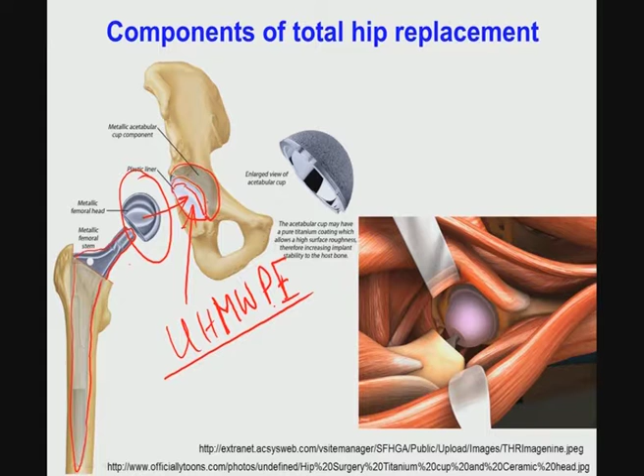Now, what is most important for the discussion in this module is whether the clinically used highly cross linked ultra high molecular weight polyethylene can be replaced with one of the materials that we have investigated for the last 6 to 7 years, that is, high density polyethylene-hydroxyapatite-alumina. Some more details on material selection for the acetabular cup or socket component. In this module I will be using cup and socket interchangeably; they are synonymous.

There is one class of THR implants, essentially hard on hard implants. Hard on hard means you can use ceramic as the acetabular socket and ceramic as the femoral ball head together. So both can be made of ceramic, or they can be made of metal. For example, metal on metal like cobalt chrome is a popular choice.

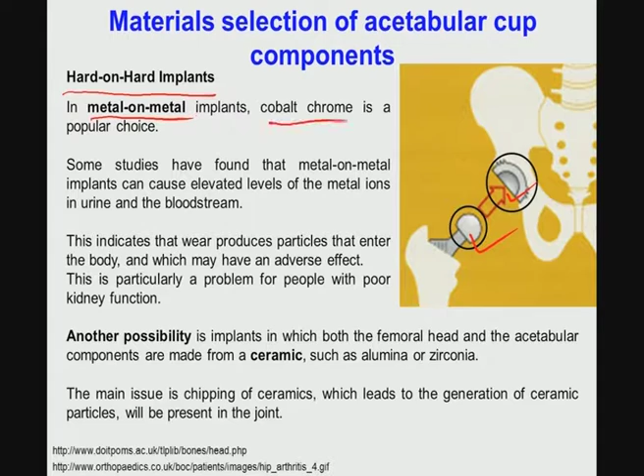The second one is hard on soft implants. What is the meaning of hard on soft? The head can be either metal or ceramic, and the acetabular socket can be polymer, where ultra high molecular weight polyethylene can be used. Ultra high molecular weight polyethylene has densely packed linear polyethylene chains, which give increased crystallinity as well as improved mechanical properties. However, it does not have a large elongation to failure, has poor fracture toughness, and also poor wear resistance.

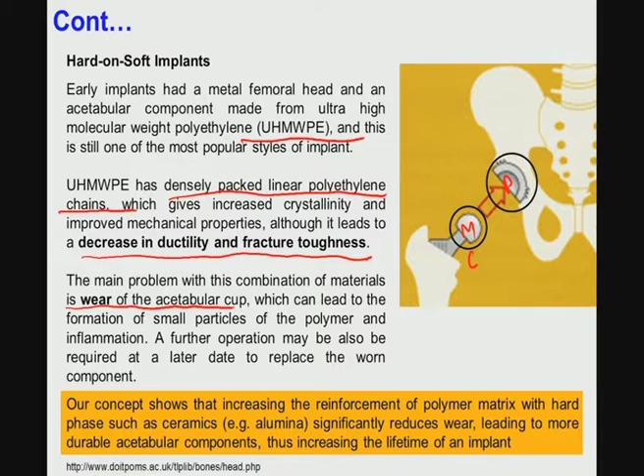As a result, ultra high molecular weight polyethylene is susceptible to wear, which leads to wear debris particle generation in vivo, and these wear debris particles, depending on their size and shape, can cause inflammatory reactions in vivo. That is number one. Number two, if the wear is very extensive, the patient has to undergo revision surgery. That means the patient has to go to the hospital and the operation theatre again.

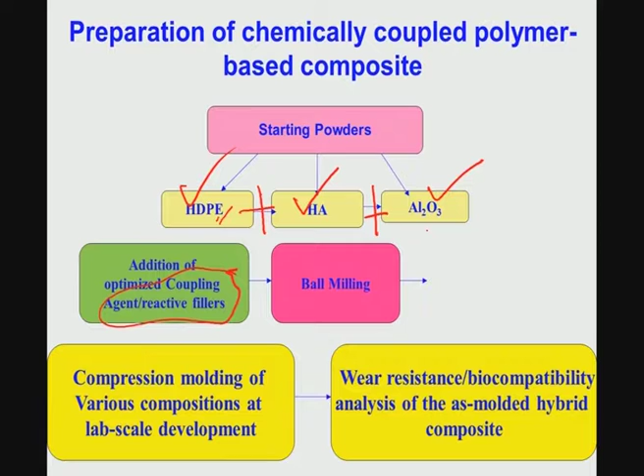So, there are three starting powders: high density polyethylene, hydroxyapatite and alumina, and then you do ball milling. High density polyethylene has a very simple polymeric chain of carbon and hydrogen. Hydroxyapatite and alumina have different inorganic compositions. If you do not couple these by chemical means, like using a coupling agent or reactive fillers, you cannot do much in terms of achieving better mechanical properties. The coupling agent can be a titanate coupling agent and so on. It essentially helps establish chemical bonding of the inorganic component with the high density polyethylene.

Anytime there is this kind of prototype development work or research, the first thing one has to do is lab scale experiments. Lab scale experiments mean one can start with compression molding of these materials; for example, you can do injection molding or compression molding of these polymer ceramic composites. Lab scale experiments essentially start with simple shaped biomaterials, meaning you can do compression molding with a very simple mold shape.

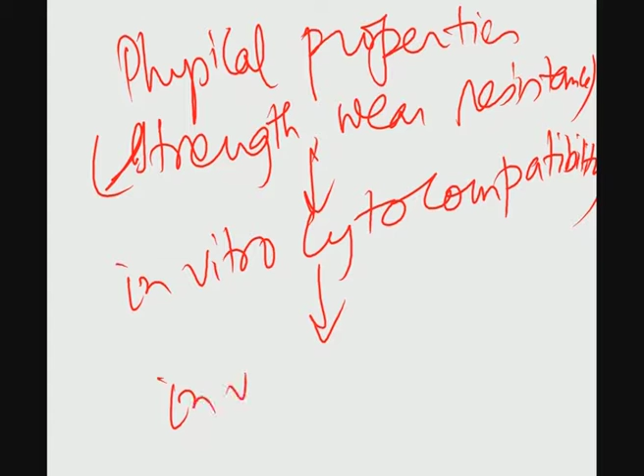Compression molding can give you, let us say, phi equal to 10 millimeter diameter samples, and you can do standard tests. The standard tests can be physical property measurements like hardness, strength, wear resistance properties. Second, you can do in vitro cytocompatibility, followed by in vivo biocompatibility of selected samples.

Okay. So, what one has to do first is screen what the optimal composition is.

Now, let us talk a little bit about the material science here. Let us say you have high density polyethylene as a matrix, and you have X% HA and Y% alumina. So, first you have to optimize the percentage of X and Y. Here you have to consider the processability, or ease of processing, versus properties.

Now, HDPE, although it has a low strength, has some beneficial properties like large elongation to failure. Hydroxyapatite and alumina, this is the ceramic phase, inorganic phase. The moment you add this to HDPE, it will decrease the elongation to failure. Instead, it will increase both elastic modulus and hardness of these materials and strength of the materials.

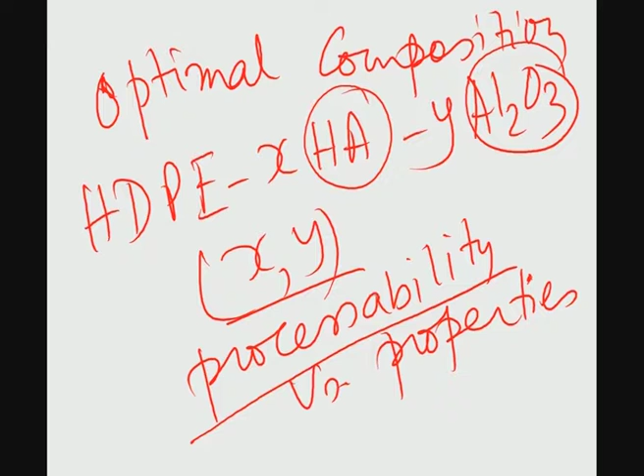Having said this, the more hydroxyapatite and more alumina present in the high density polyethylene matrix, it will have an opposing effect on the processability or moldability, because by adding hydroxyapatite and alumina, the viscosity of the HDPE melt would increase. The higher the viscosity, the more difficult it is to mold these kinds of materials, or to give certain shape to these materials. So, you have to critically consider the processability of this material versus the properties of these materials.

So, as I said, one of the major motivations to develop high density polyethylene-hydroxyapatite-alumina is to enhance the wear resistance of this material, and typically wear resistance is investigated using the fretting mode. Fretting essentially means a ball-on-flat type of configuration. This ball is made to slide in a reciprocatory motion against the flat material, and this relative displacement amplitude is of the order of 100 to 200 micron, that is called stroke length.

Now, when this kind of reciprocatory motion and stroke length is there, then at this interaction region, wear debris particles will be generated, or this HDPE composite will experience wear loss and so on. So, one can measure the wear rate.

Now, two aspects we have studied. We have changed the interface, we have changed the counter body. We have used three different counter bodies: one is steel, one is alumina and one is zirconia. The selection of these three counter bodies can be rationalized from the fact that stainless steel based material is widely used as one of the femoral heads. Alumina and zirconia are the other two potential femoral head materials. So, essentially we are trying to simulate the exact contact conditions that are present here.

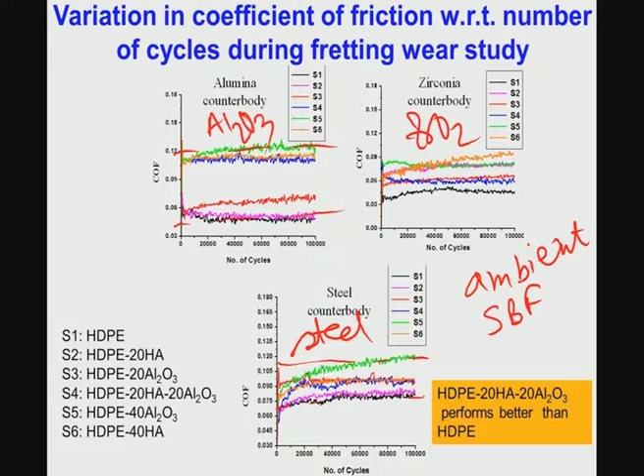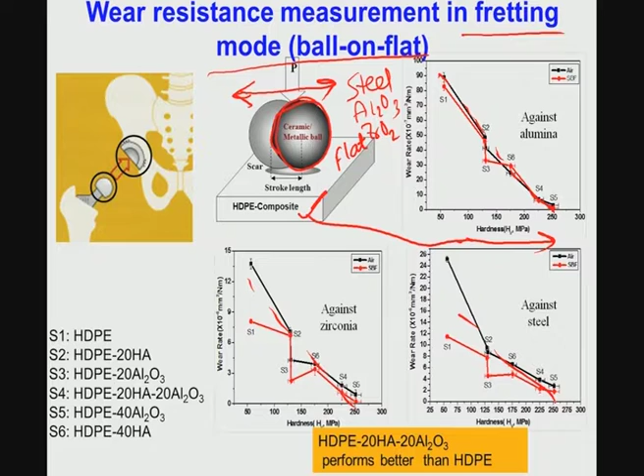Now, in terms of wear resistance, what you notice here is that as you increase the hardness of the flat material, that is high density polyethylene-hydroxyapatite-alumina, the wear rate systematically decreases. What it means is that by adding hydroxyapatite and alumina to high density polyethylene, you can increase the hardness of the material, and you also increase the wear resistance of the material without compromising much on the frictional properties.

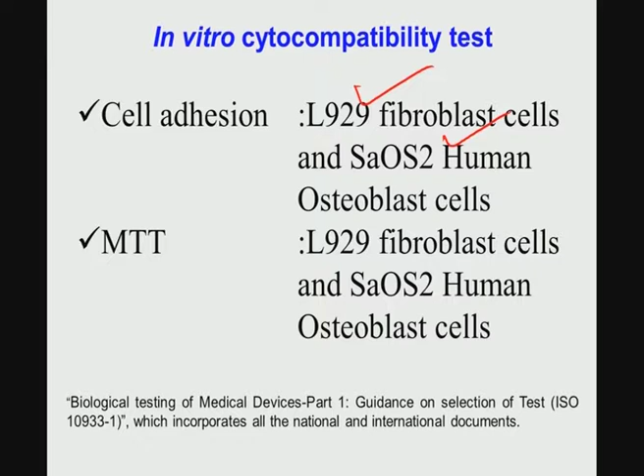In terms of the in vivo implantation, we have done two types of experiments for two different time periods, both in rabbit.

So, in one case we have used the femoral bone defect model, as I have also mentioned in some of my earlier lectures. In another case we have used a large segmental defect. Large segmental defect means some part of the femur is cut, and then you implant a similar sized implant to fill that large segmental defect. So, instead of making a hole, you can simply cut the femur part and then put the implant there.

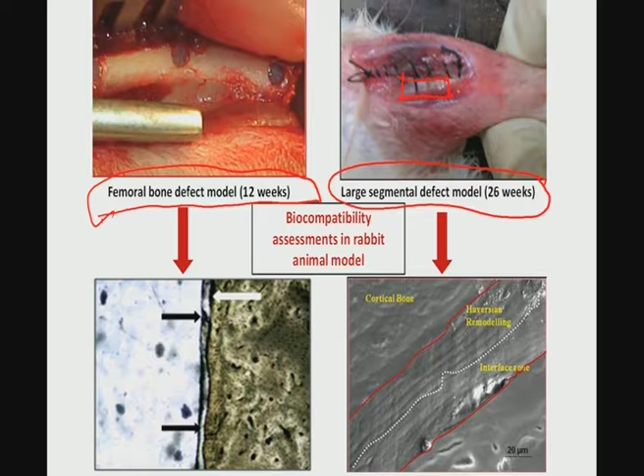In the biomaterials literature, there is another term, that is called critical size defect. So, it is also one type of segmental defect. The term critical size defect essentially means the defect's length is around 2 to 3 times the diameter of the anatomical location or anatomical part where you are placing it.

So, to substantiate this statement, for example, if you are putting that critical size defect in the femur of an animal, you know what the femur diameter is; the length of the segmental defect should be 2 to 3 times the femur diameter, then only you call it a critical size defect. Now, in all these cases, one is to see how this critical size defect is healed over several time spans.

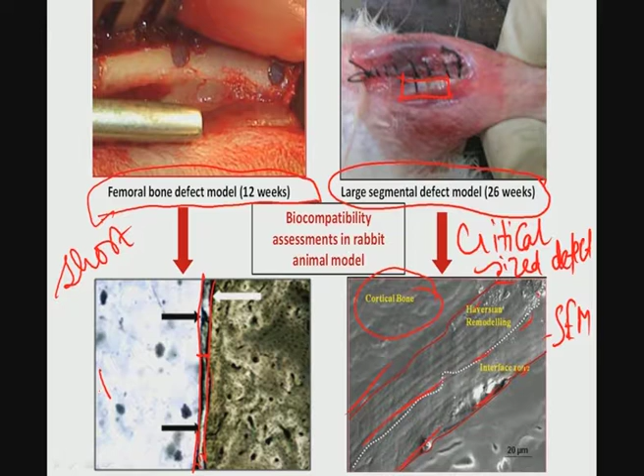Then after that you see these histology images and so on, and this is your SEM image. In both cases you see that there is neobone generation, and you can say that is Haversian remodeling, and this is clearly shown at the interface zone, and this is your cortical bone, that is the host bone. Here also it is cortical bone, and the other part is your implant. This is the case of implantation in the segmental defect model.

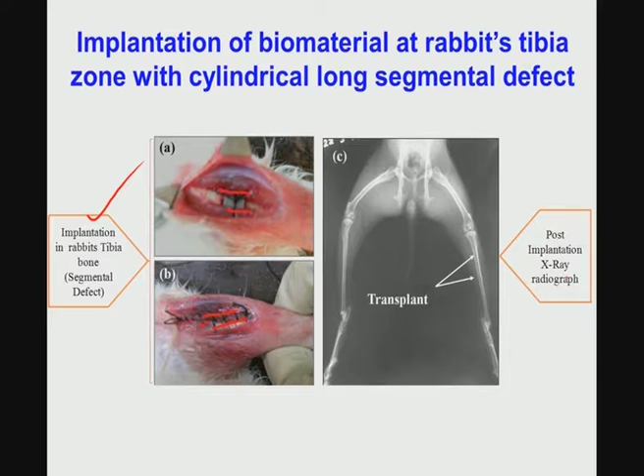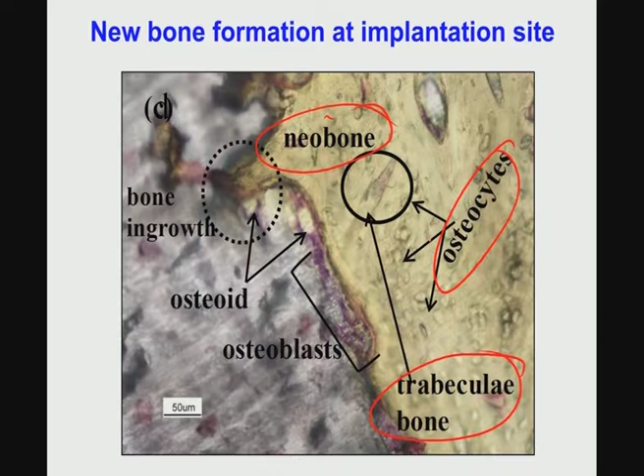Here you can see that it is placed with sutures and so on, and this is how the transplant looks in the X-ray radiograph in the rabbit model. This is more evidence of new bone formation in the histology slides, that you have trabecular bone here, that is very spongy, you have the neobone on this material, and you have some osteocyte activity, because osteocytes appear with different morphology and can be distinguished from osteoblasts, as I have said before. Osteocytes have a more star shaped morphology.

Now, in the short term implantation we have done some micro-CT analysis also, and it shows bone volume to total volume, and we have also done histology to see the typical bone area of these materials, and what the bone area is in the distal site, the middle site, and the proximal site.

So, normally what you see is that with respect to high density polyethylene, with the high density polyethylene hydroxyapatite alumina composite, not only is your osseointegration uncompromised, but also quantitatively the bone contact area increases. That means this material promotes more bone regeneration around the implant.

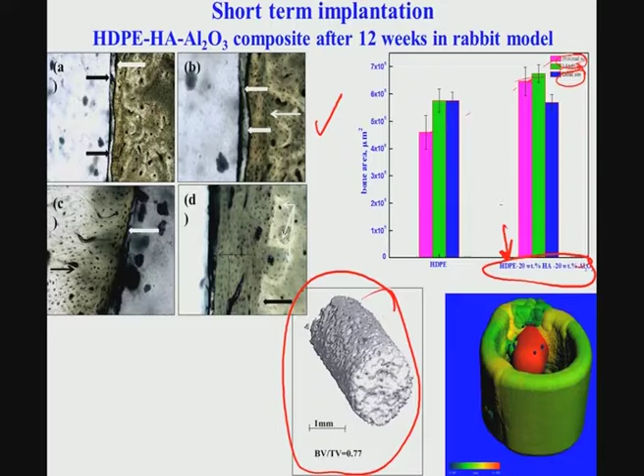Now, once you complete all these lab scale experiments, the next stage is acetabular socket or acetabular cup development, or any device development. So, the first thing one has to do is to get an engineering design file of the device or implant.

Now, for the engineering design file of the implant, you can take a commonly used device diameter which is used in a given patient population, or you can take patient specific dimensions, like you take the CT data from the patient itself, then convert it to the engineering design file. Based on the engineering design file, either you can give it as an input file to a 3D printer or any rapid prototyping machine, so that you can get a near net shaped device, or based on the design file you fabricate your experimental processing or manufacturing facility to get this kind of device, let us say acetabular cup development.

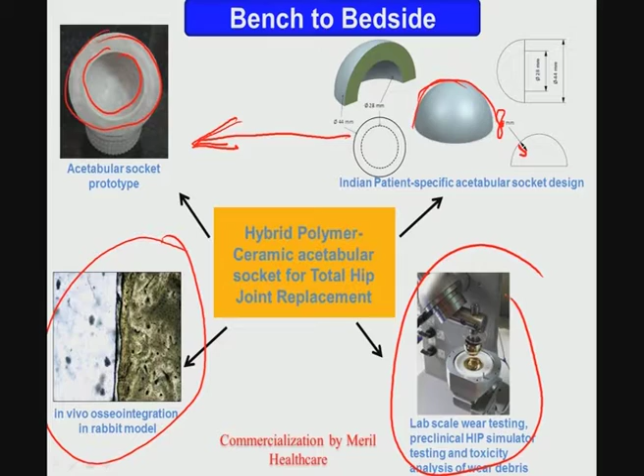So, first is the engineering design, then you do compression molding in a large scale setup, then this is essentially based on the in vivo osseointegration, and then ultimately you can do the total hip joint hip simulator experiments.

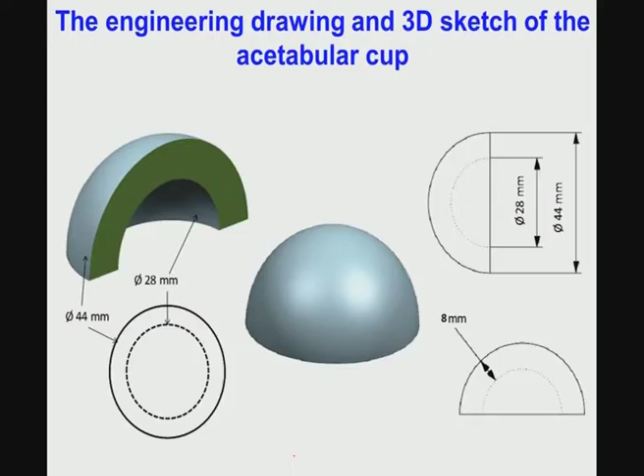Now, just to give a snapshot of whatever I have shown in this particular slide: first is the lab scale development, which I have already described. The next step is prototype development, and in prototype development the first thing is the designing of the acetabular socket, then designing of the mold, and then various trial runs to get this compression molding, and then you can do this near net shape manufacturing.

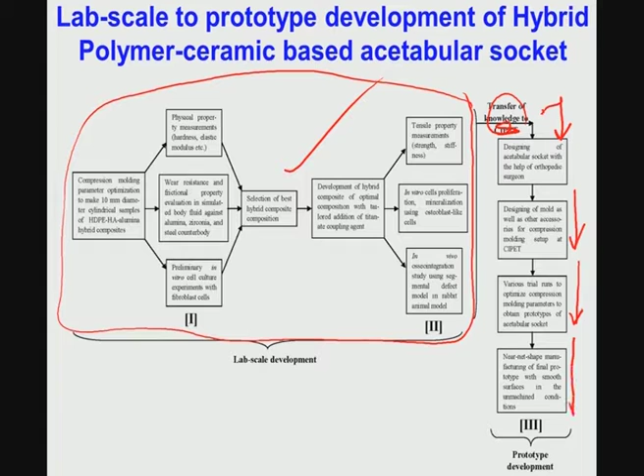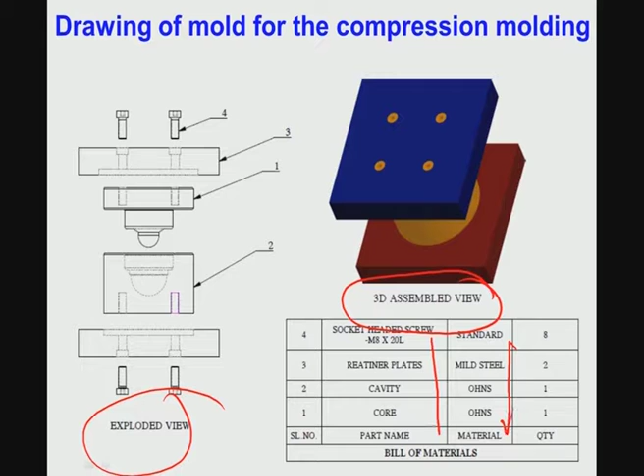So, this is the engineering design file. Based on that you can fabricate the compression mold with a specific geometry. This is a 3D assembled view and this is the exploded view, and these are the different retainer plates, cavity and cores, and this is the mild steel and other material that will be used.

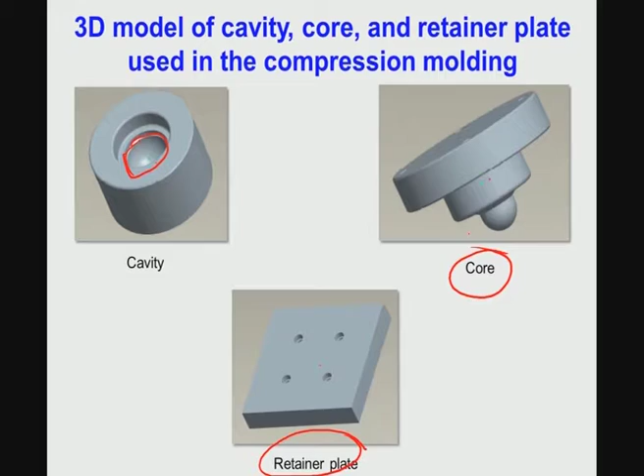So, this is the cavity. The cavity should reflect the ultimate shape of the femoral acetabular socket material that you want to develop. This is your core part and this is your retainer plate. This core part or retainer plate is part of the entire compression molding assembly that we are using, and this is the total compression molding assembly as you can see.

This part of the work was carried out in Central Institute of Plastic Engineering Technology, Chennai, and this is through a heating coil arrangement. You can locally heat this entire assembly, but this heating requirement is fairly minimal unlike ceramics. So, if you heat it at close to or below 200 degrees Celsius and it contains HDPE, that should be fine.

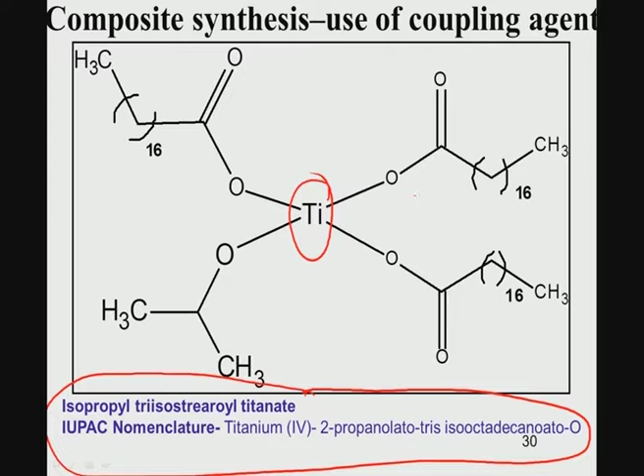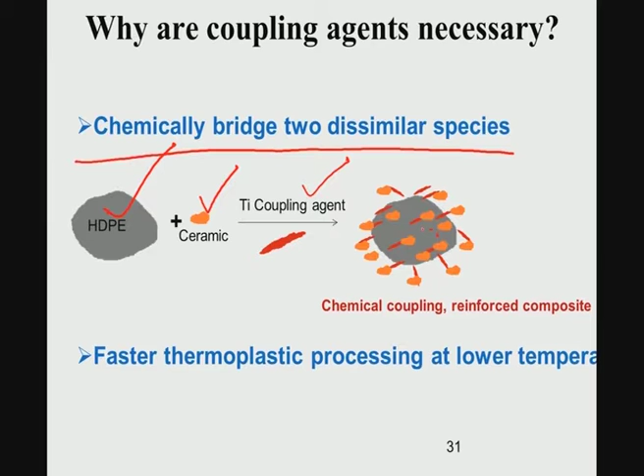Now, earlier I mentioned that a coupling agent needs to be used, and one of the coupling agents that we have used is a titanate based coupling agent with this particular formulation. There is a titanium in the center, and all this chemical composition is very characteristic of this coupling agent. Why is a coupling agent necessary? It is to chemically bridge two dissimilar species, which are chemistry-wise different. So here is a titanium coupling agent, you have high density polyethylene, you have a ceramic, and then you get chemical coupling, that means a reinforced composite, and therefore faster thermoplastic processing can be accomplished.

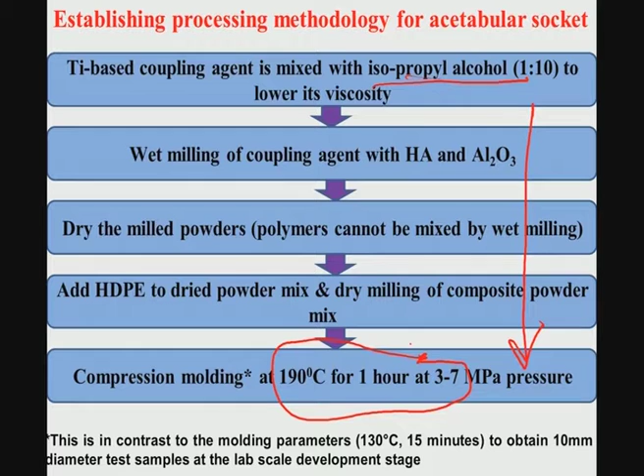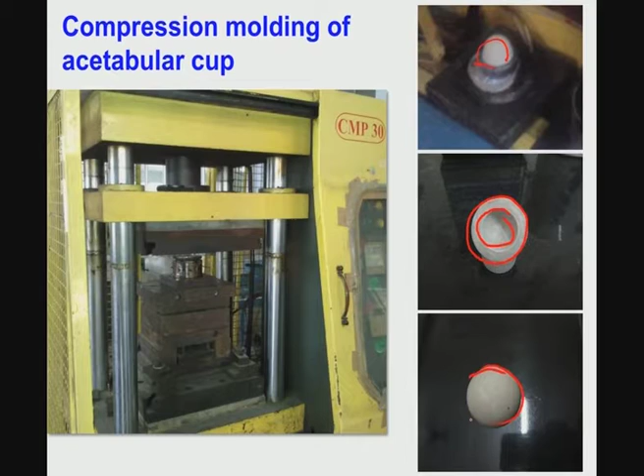As far as the processing is concerned, one can use 2% or 3% of the coupling agent, with isopropyl alcohol as a medium to mix this coupling agent with the powder mix. Then you can do compression molding of this large acetabular socket type of device at 190 degrees Celsius for 1 hour at a fairly moderate pressure of 3 to 7 megapascal. This is how the compression molded socket looks, as fabricated near net shaped, so you do not need to do any machining to get the final shape. This is really an illustration of the near net shaped fabrication of the acetabular socket.

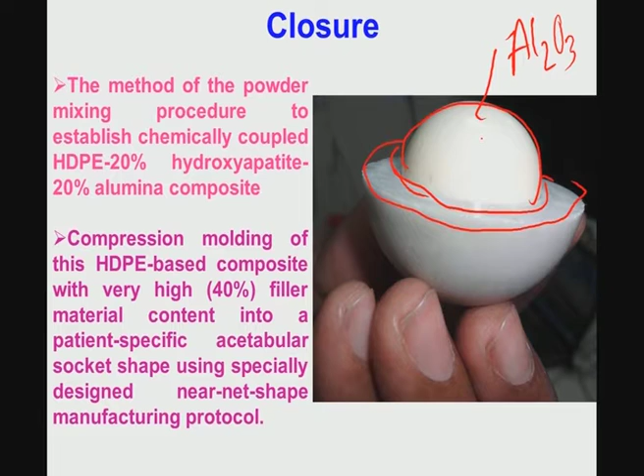Now, this is what can be seen. This is your alumina femoral head. Somebody is holding this alumina femoral head with the acetabular socket just to show how geometrical conformity can be established in this process. So, the alumina femoral head is exactly going inside and fitting into the acetabular socket. In the process we have also established the fabrication route.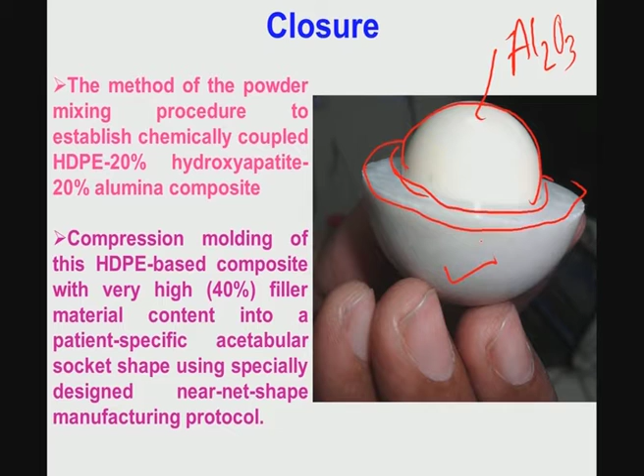Although I have not shown it, when we did microcomputed tomography of the HDPE based socket, we did notice a uniform distribution of hydroxyapatite and alumina, and it is a crack free and pore free composite. So, this process is also capable of producing structurally robust device components. Another note I would like to mention is that we can use titanium based coupling agents like titanate, and this material has a surface roughness of less than 1 micron, which is clinically acceptable, like 0.5 to 0.6 micron.